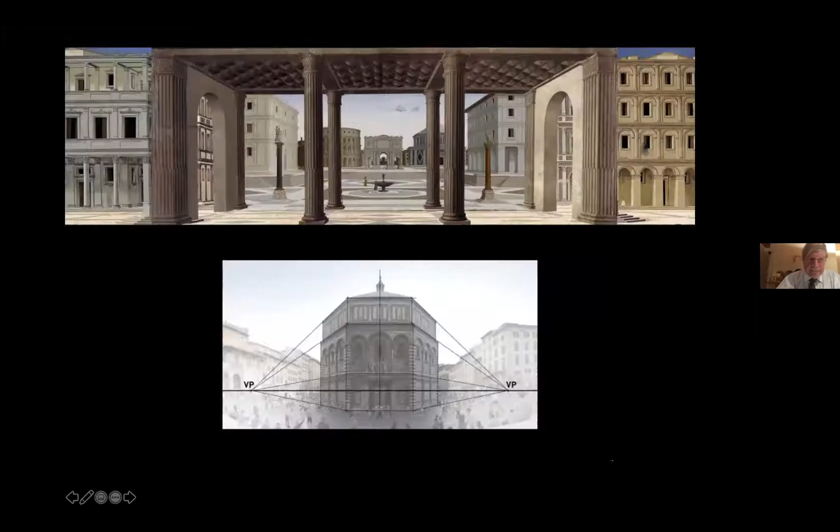You could argue that the problem wasn't so much the frame itself, but the perspective that occurred inside of it. Frames had been around for a long time, but it's significant that the mechanics of drawing a perspective were invented by an architect, Brunelleschi, and the first treatise on perspective was written 20 years later by another architect, Alberti. What the perspective did was essentially to locate the viewpoint, not the real viewpoint from which you're seeing the painting, but the virtual viewpoint where the viewer would have to be to see the painting in that regard.

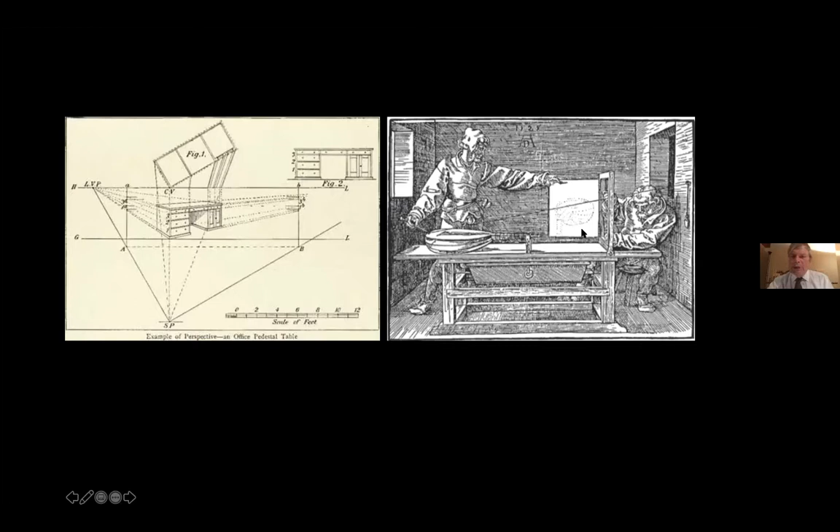This happens to be a piece of furniture, but this is the result. Again, it's not like a building elevation or a plan. You are located at a particular place from which you see the frame, and you see this image inside the frame. This is Durer's representation of this process. Here is the frame, and this represents the picture plane, the difference between the real and the illusion. On one side is reality, on the other side is this image, this representation of something three-dimensional, which is not.

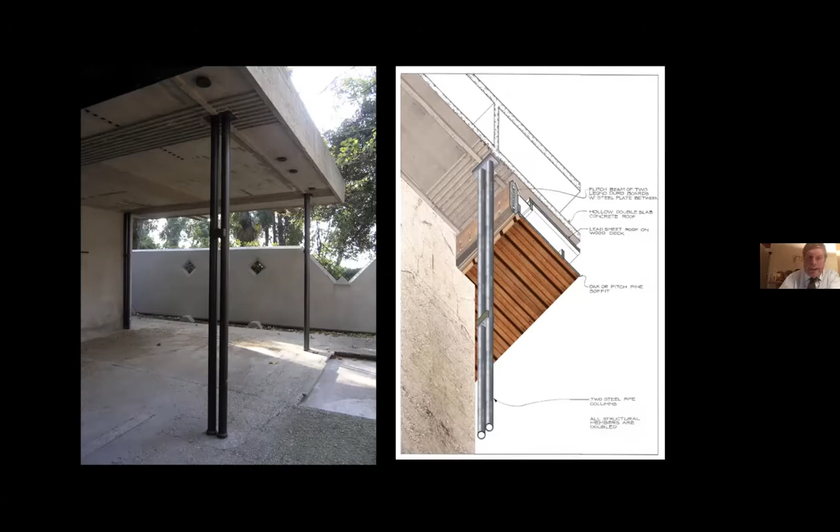What was really critical to Scarpa in terms of his engagement with the Castelvecchio was the building culture of Venice. It was very much about layered construction, as was Scarpa's approach to renovation. The Roman palazzo, the Florentine palazzo, were thick-walled, largely monolithic stone buildings. Not so the buildings of Venice—typically brick, with a thin layer of either plaster or very often marble on the outside, what we would call a veneer, what Ruskin called incrustation, or in the case of the brick domes of St. Mark's, covered with mosaic tiles.

Part of the reason for this layering was practical. Venice is built on a lagoon, and all these buildings are on timber piles. Making a building more massive and monolithic may make it weaker rather than stronger. But I think it's more than practicality—it was largely a question of building culture. Venice was very closely associated with Constantinople and Byzantine architecture in its early years, and it was the obvious transfer of this veneered style of building, very much associated with Byzantine architecture, to Venice.

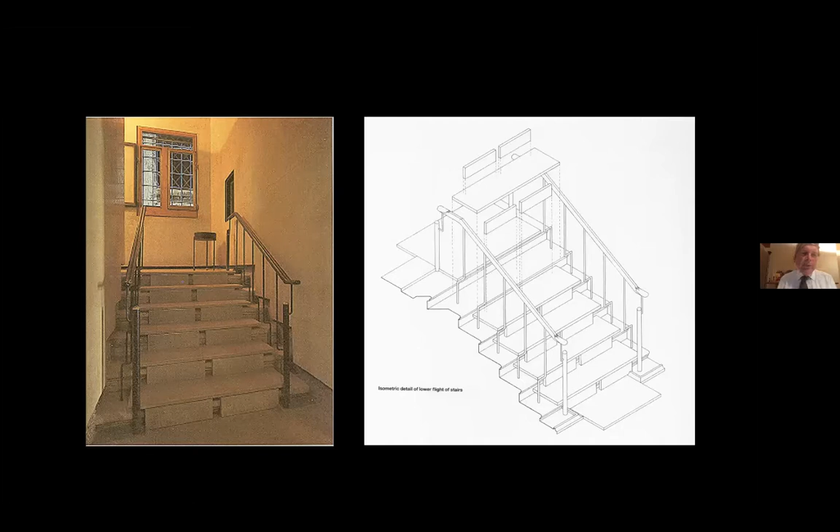If you look around Venice, you'll see this layering strategy very much in evidence. This is an Olivetti showroom, basically an office machine display store, in the Piazza San Marco. It's layered in a series of ways.

These stairs are one type of layer. But a different one is what happens along all the corners of the building. All these veneered surfaces stop well short of the junction, so you see the plaster panel here, the concrete behind it. Again, the terrazzo stops here, so you see, in theory, the concrete floor underneath it. It's literally delaminating the building to show you its layers.

This is upstairs in the showroom—an old load-bearing brick pier that had to remain in place, and Scarpa clad it with thin layers of stone. Look at the way he does it: the corners aren't mitered, but the edge of the stone is left rough while the face is polished. You get this stark contrast, this sort of pinwheeling effect. There's even a little hole so the mason can reach in and complete the fastener that holds the veneer in place. The point is he's celebrating, in fact exploiting, the quality of layering rather than trying to disguise it.

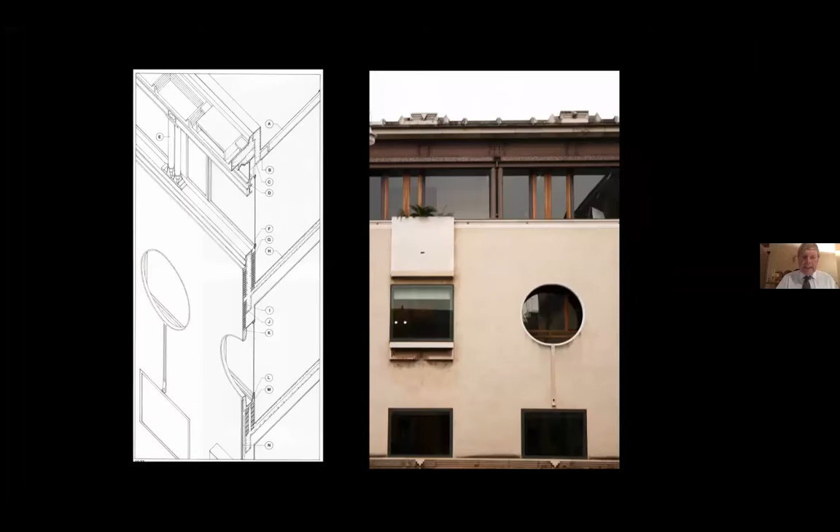This had an interesting effect when applied to the window. This is the Bank of Verona, and there's nothing historic in this building—it's a brand new construction from inside to out. But it shows you that Scarpa continued this layering strategy in the facade, and it resulted in a rather curious kind of window.

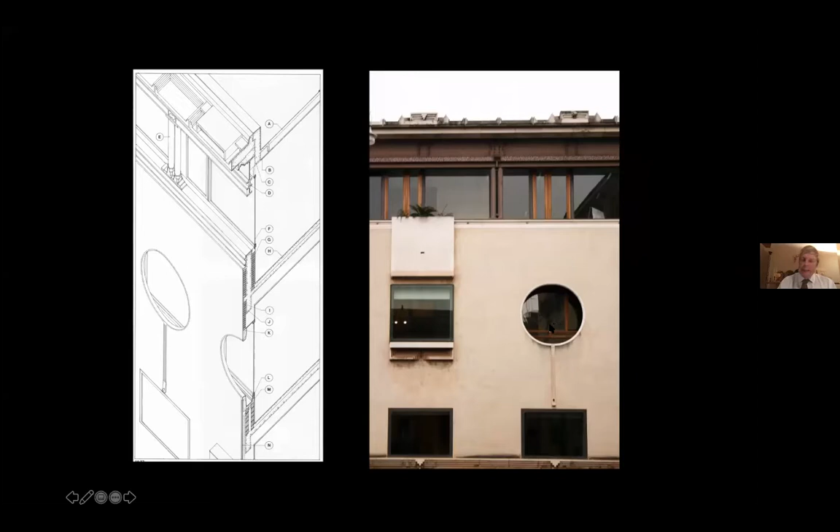There is a wall plane here constituted by what's really a concrete wall faced with brick and then stucco, with rather conventional window openings cut in, frames if you like. But the glass is never set directly in the opening—or not never, but for the most part it sits in front of it, as here in this projecting bay, or behind it as in this round one. The window behind the round bay is actually square.

I don't know for sure this is good grammar, but I'm going to call this modes of unframing, and talk about the various strategies Scarpa used to both get rid of the frame and get rid of the pedestal.

I don't know if Stephen Leet is part of the audience today, but if he's there, he's probably thinking, isn't it time to talk about Franco Albini? And he'd be right, it is time to talk about Albini. Scarpa was not alone in this exercise.

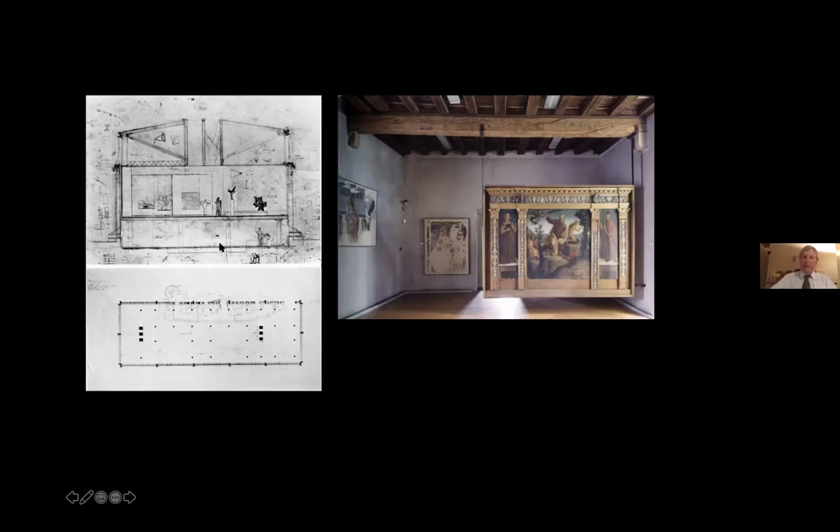Hanging was a solution to this. This is another moment in the Castelvecchio. This allowed these pieces to literally float in space. This was a proposal, again for the Biennale, in which all of the painting in the space would be suspended from the roof. But there are obviously practical problems with doing this throughout.

This, I think, was the arrangement that Scarpa really preferred, particularly this one, which is simply that the painting is liberated from its environment. It's put on this easel at eye level, so it becomes literally a person in itself, very much like the Giacometti's I was showing you. Often he will put these facing away from the door so that you have to walk around the front to see the piece.

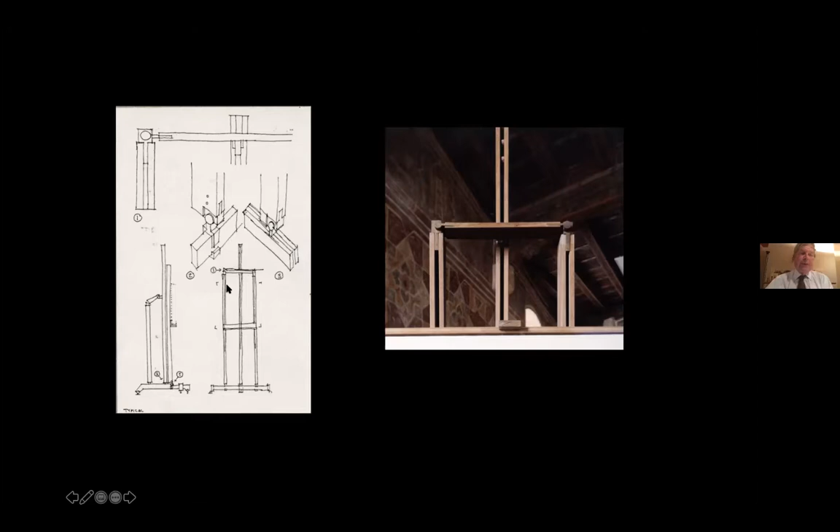This is another arrangement, the freestanding painting as an object within the room. This is called a cavalletto in Italian, a Scarpa piece of furniture well worth looking at. You can see all his devices at work here—the structural doubling, the little brass fasteners holding it all together—and again it's a little kind of miniature Scarpa building. But what he really loved about these is they had an anthropomorphic quality, so that the painting became a freestanding person in itself.

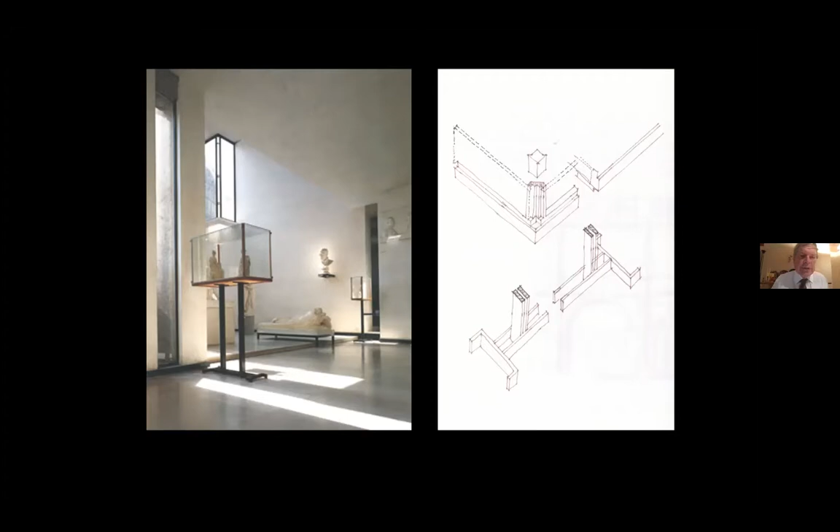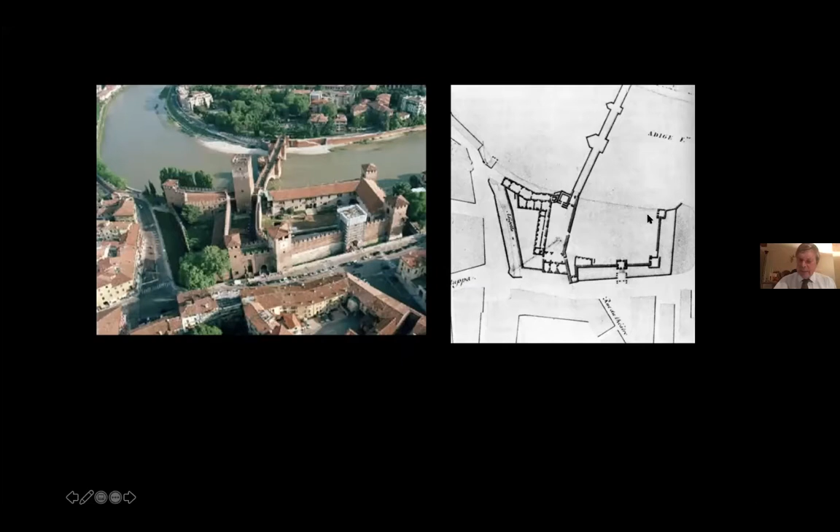This is the way the plan was until about 1800. This is the building where Scarpa's museum is located, but that was not there at first, it's not part of the medieval building. In the Napoleonic era, the threat changed to the north and they built a wall on what had otherwise been open.

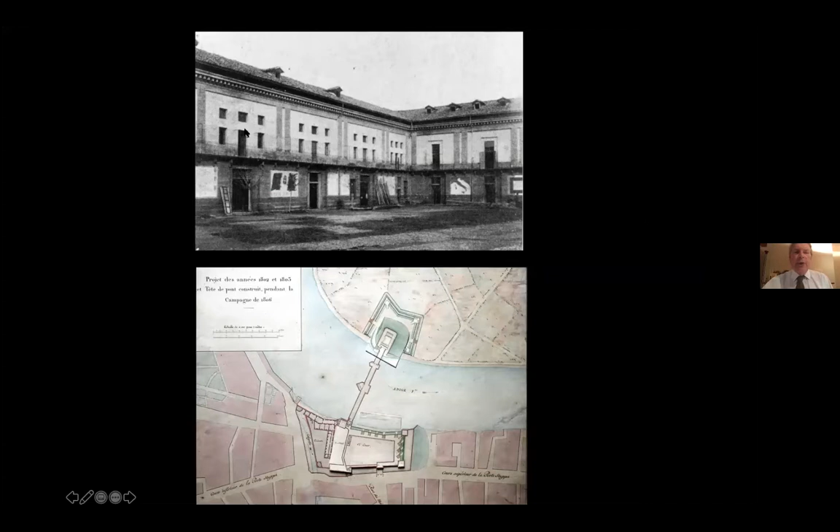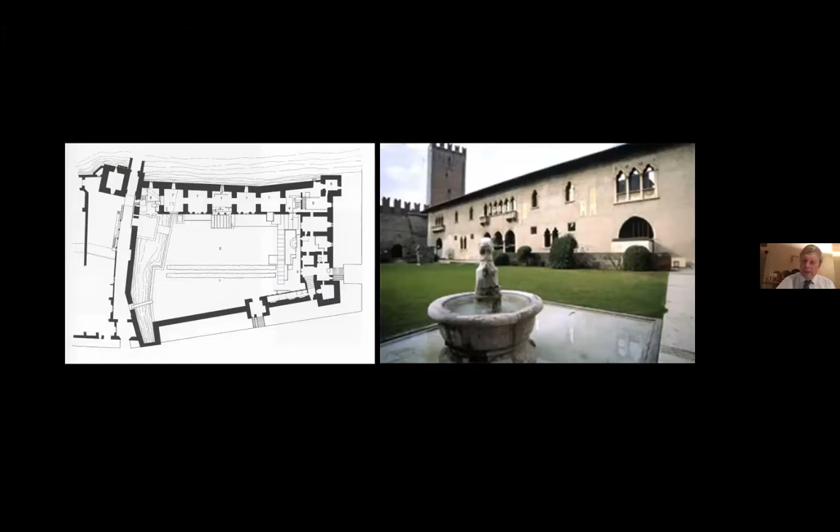Then the Austrians, who occupied Italy in the early 19th century, built this rather uninteresting barracks there. The old barracks became a museum in the 1920s, and it was a pretty cheesy affair, very much an ersatz Venetian palazzo. The inside had fake fireplaces and fake beams, and the outside was redone with fragments of a Venetian palazzo.

This is a real Venetian palazzo. These are fragments of one worked into this wall in a way I'm sure Scarpa found repellent. So if you were doing a historic renovation of this building, there would be, in Scarpa's mind, a good argument for just getting rid of this part, because this is real medieval architecture, while this is the fake medieval architecture.

But because it was the museum, Scarpa really couldn't dispense with it altogether, so he tried a couple of things. He originally wanted to get rid of these fake elements, to cut off the top of this wall to distinguish it from the real medieval parts behind, but the museum director wouldn't let him do that.

What he did do is basically delaminate the building. He divided it, as he had done elsewhere, into a series of layers, adding some of his own and revealing some of the old. He also cut the new false layers away from the old real ones, right here where this new wall touches the old, cut away to form a window.

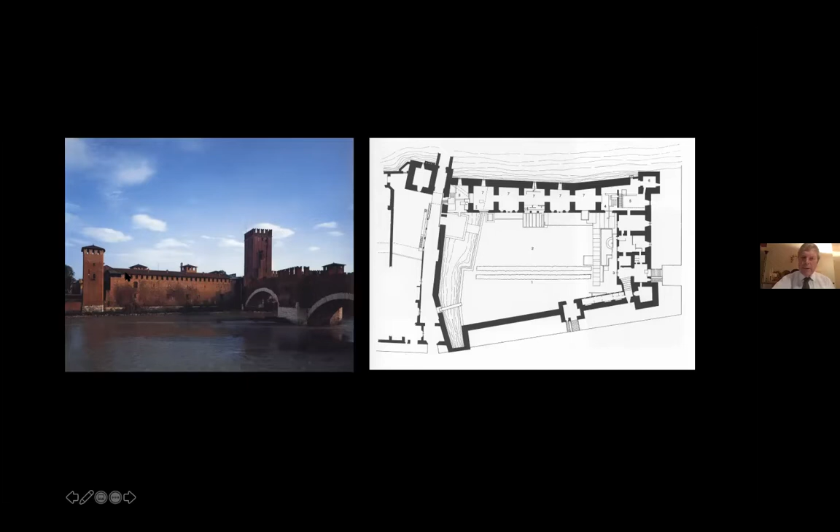The other window is this famous shot you see of the Cangrande statue, and again you can see the window on the other side. You can see him delaminating and peeling away the layers to tell you the story of this building. Notice that the plaster stops here, the stone stops here, showing you the steel frame. The tile stops here, then the layer of copper continues, and finally the beam continues over to the old wall.

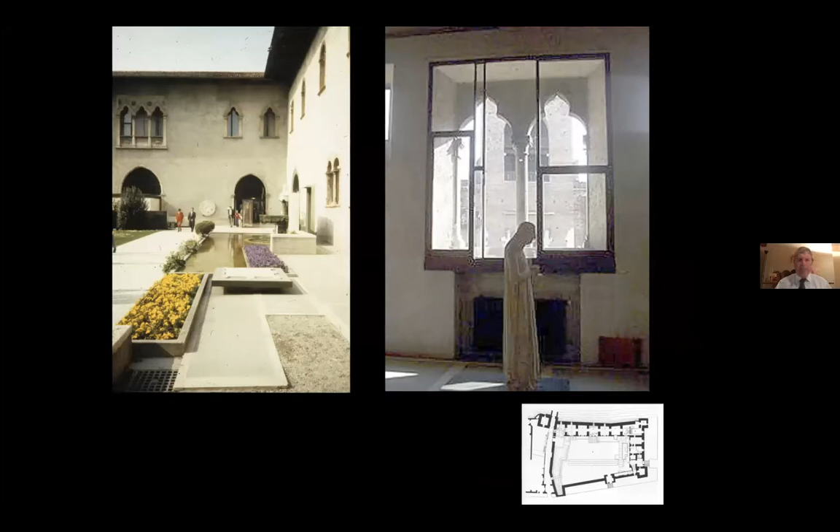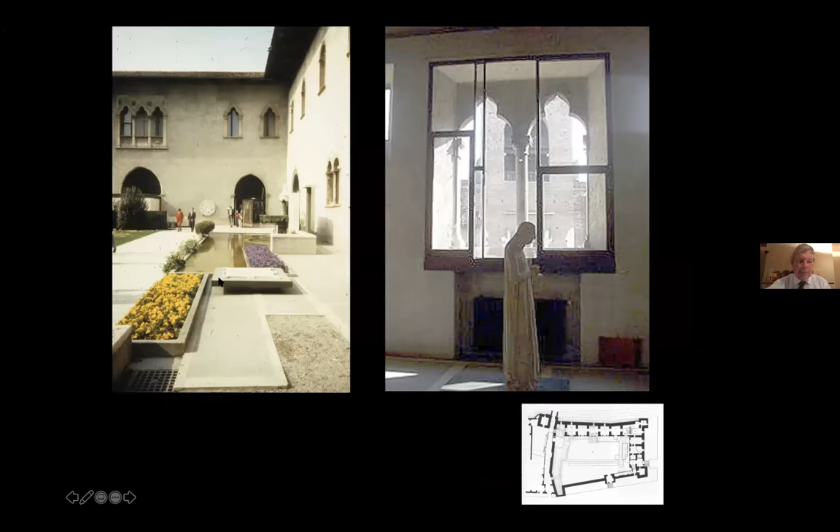This copper roof does not extend all the way under the tile—it's a symbolic layering at best. But this layering strategy continues and sets it up as you enter the museum. Scarpa thought of the floors of this museum as pools of water, and he literally sets up this metaphor with these floating floor slabs before you enter.

Of course, it's layered on the inside in this traditional way. The actual glass is pulled way back from the opening, so you get this layered window we've already seen. It's a familiar Scarpa detail where everything stops just short of meeting the next layer. Notice these stone slabs occur only on the side of the opening—they don't wrap around.

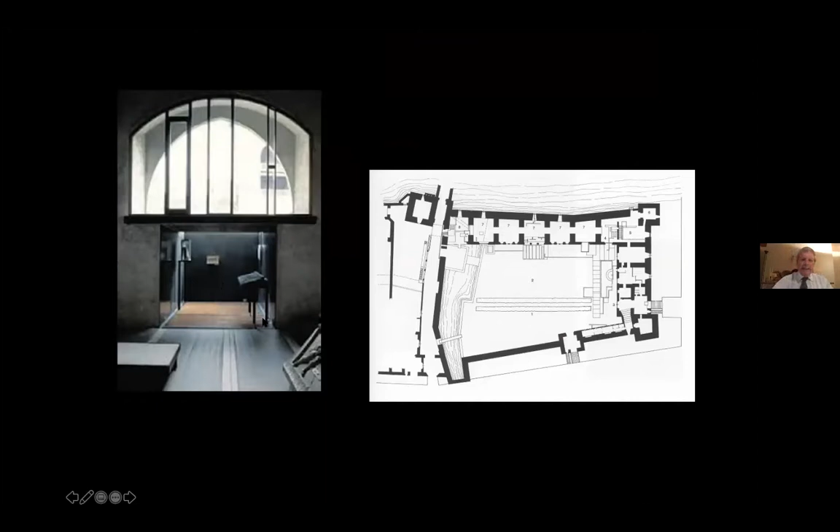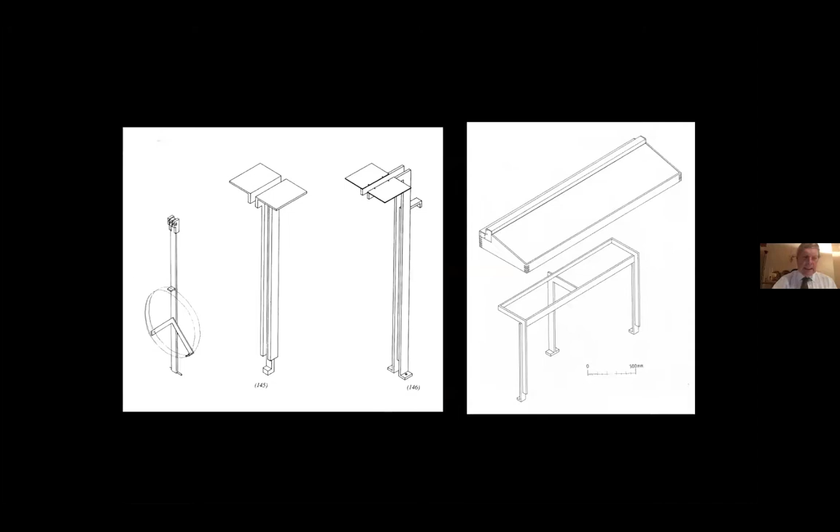This little piece is called the sacello. It sticks out of the building right here. It's interesting to see how these parts are supported—they're not literally hung on the wall. There are a series of steel frames and steel angles wrapped around the edges of the building, and all of these connectors are welded to them. Again, this indirect support—this one is hung, a strange sort of tripod of effects holding up this glass case. You can see it's always doubled structural pieces.

Of course, the key piece of delamination here is this rather structurally strange but visually compelling steel beam that's holding up this concrete floor. They're only connected at one point—you can see the end of the steel beam here. For the most part, the steel beam is separated from the concrete, but it supports it at midspan, a good place to support it with this small pivot.

Scarpa had the advantage that in this part of the museum, it was divided into the sculpture gallery and the painting gallery, which seems a bit pedantic, but it gave him the opportunity to put the sculptures in spaces where there was literally nothing on the walls. The typical sculptures he was showing are very much like these—carved all the way around, but made to be seen frontally.

This is another church in Verona, and these pieces are still in place. They're carved but rather uninteresting from the back, so you can't tell much about them. It's interesting to see what Scarpa did in terms of studies. He worked around the museum for a long time, and this was the first arrangement set up in the 1950s. Entering the room where this photograph is taken, none of these pieces are facing you—they are facing away, in fact facing the window to catch the light. I think it was partly about lighting, but also about avoiding the confrontation.

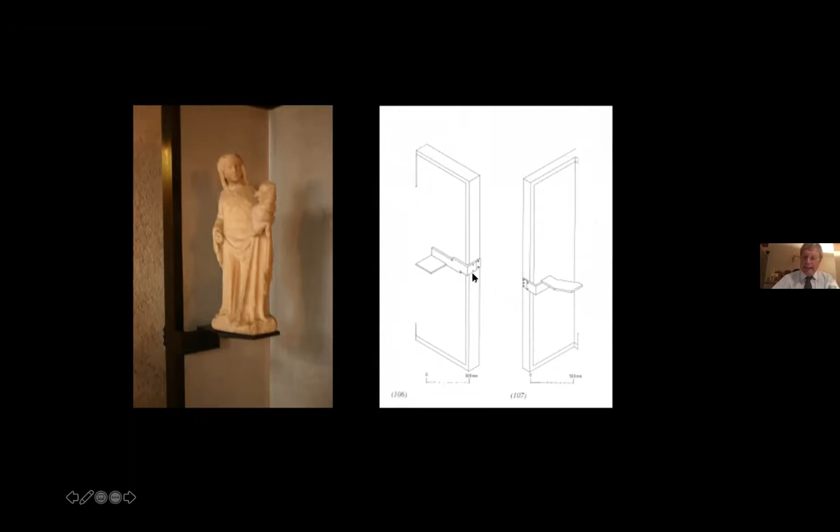Richard Murphy says that this Madonna is missing her hand, and that this represents the missing hand. I have a slightly different interpretation. This Madonna is in contrapposto, that is this classical Greek pose where the weight is on one leg. The other Madonna, which is considerably heavier, both her and the Christ, quite a few more pounds, but it's a far more direct load. And again, without the contrapposto, has this slightly different arrangement.

Again, this is the last piece, the last room. Again, at this place there is a pedestal, but the sculpture's at eye level. But this brings you to the Cangrande.

This is, again, the centerpiece of the museum. This one was put in its original location. That is, it was meant to be—this was the Scaligeri family, and Scala in Old Italian means ladder. And this was their symbol, so their tombs, this is elsewhere in Verona. This was where this statue was originally located.

So what Scarpa is doing is your first exposure to the statue is from the way you would have seen it in its original location. As you move through the museum, you actually come back this way, you see it more directly. But again, here it is at this point, as you move back through the museum this way, you see it in a different light. These are very interesting rooms over here.

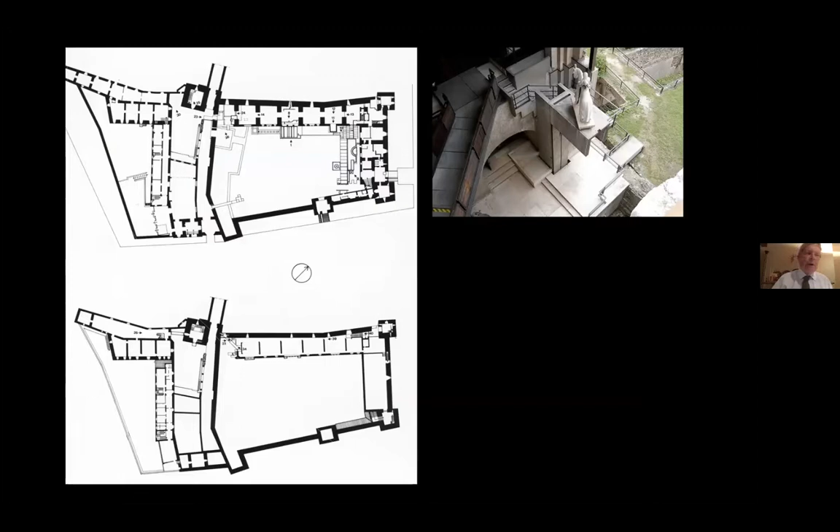They weren't very often changed because they were genuine medieval works, but this is one of the more interesting ones. Scarpa's doing here with these easels what he had done with the sculptures in the room. He's really personifying these paintings.

They're hung at eye level. They are freestanding within the room. They're not hung on a wall. And again, as you see here, when you enter the room, two of them are facing away from you, and one of them is slightly angled to the view you're seeing.

But again, this I would say is really the point of this lecture: that this strategy, which is certainly present in the Giacomettis—a far more modern view, one where there's no framing, no confrontation, no axial picture plane or station point—is the same strategy used to arrange the sculptures here, and the same one he used to arrange the...

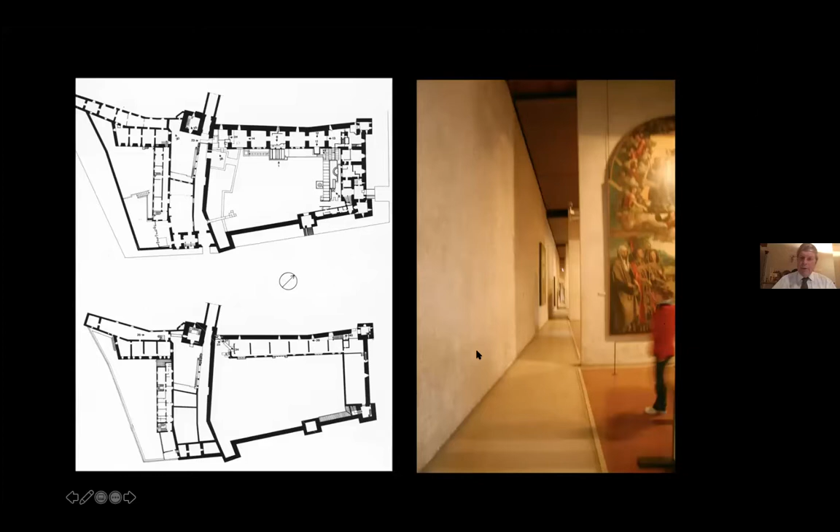Paintings here. The picture gallery, which is on top of this, is less interesting. Originally, these were—Scarpa actually closed up the center doors and opened up the edges so that you had this almost freestanding set of partitions. This is looking along that wall. And again, he didn't really want to hang paintings on this, but over time they've been put there.

Fehn, like Scarpa, saw the world in layers. He was far more interested in horizontal layers than he was in vertical ones, and it had to do with his particular view of his home country.

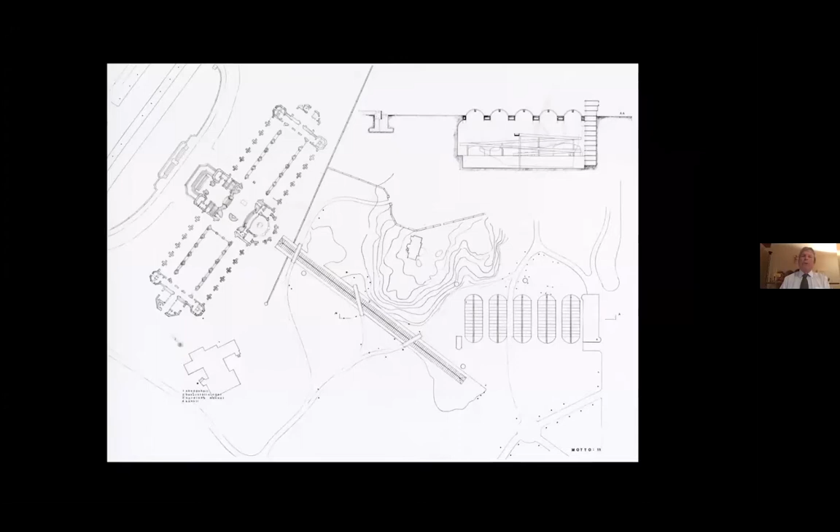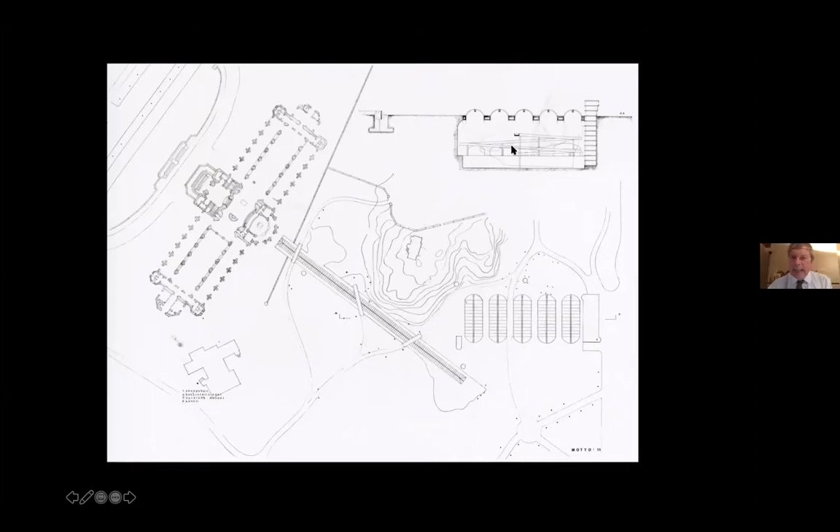And Fehn's idea was to rebury it, basically. This is the main museum, and this is the top of Fehn's museum there, which you really couldn't see except for the skyline. Again, he wanted to put it back in the ground in this excavated museum.

This was a later competition. This was an old mining town in Norway, and this would seem to be the obvious program and location to have an excavated museum. Here he chose to do the opposite, that is, he made a bridge. His museum floats in the air, touching the ground only at two points.

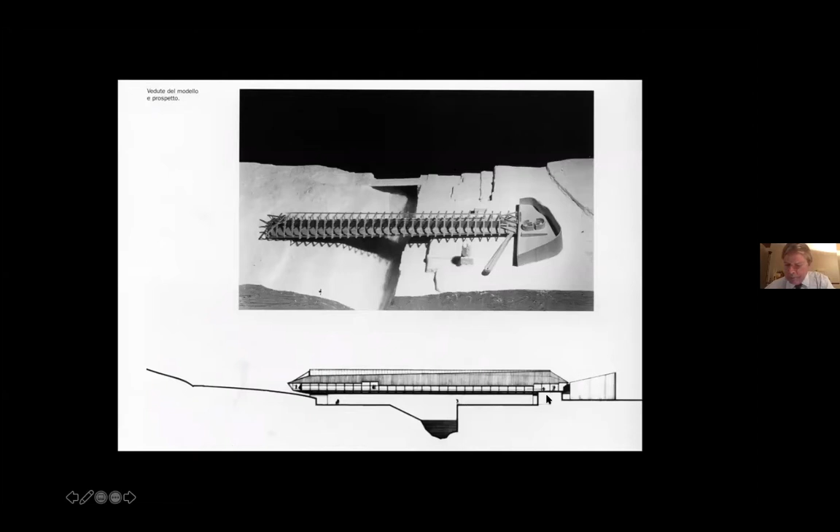But again, this is Fehn talking about the magic of history, the excavated artifact, and as we'll see, this is very much about what the Hamar Museum was about. This is his drawing of those three museums: the underground Vasa Museum, the floating bridge museum, and the Hamar Museum, which what you're seeing here is a ruin. These are the ruined walls, these are the archaeological excavation, and these are the two bridges that float above it.

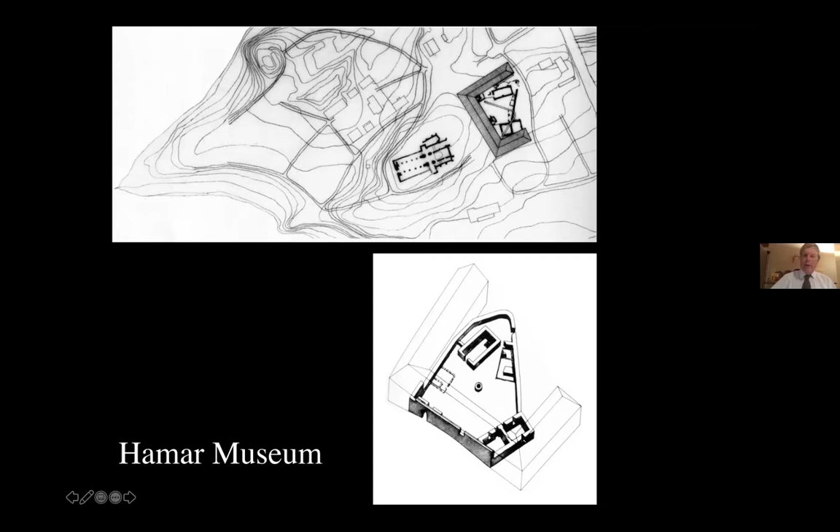So there were three very distinct historic parts of this building: the old bishop's palace, which is the same age as the church, and this barn on the outside. This was in ruins. Again, the walls were there, but the roof was deteriorating or gone by the time Fehn took it over. This is not the Fehn project - this is what encloses the old ruin of the church.

This was done by Lund and Slaatto. It is actually a very nice building, but it's a very different approach than what Fehn would take - that is, the sort of gigantic glass display case. This is Fehn's building. Again, he basically rebuilt it from the top of the stone wall, and of course he did a lot of work stabilizing and preserving and restoring the stone wall.

See the layering already in this case is effectively reversing what Scarpa had done. He puts the glass on the outside rather than the inside, and lets the ruinous state of the wall exist. Again, the museum has distinct parts. You can see a bit more of this glazing here.

This is the auditorium. This was a museum you might call a folk art museum, basically tools of day-to-day life. This is what was the oldest part. This is where the remains, these walls were at least in part the remains of the older building, which is the palace.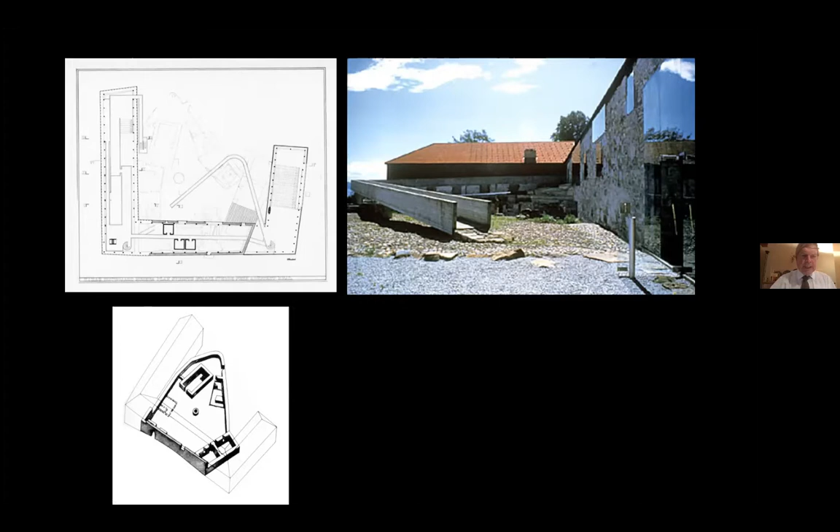What is really almost shocking about this arrangement is this ramp, which I'll come back to. But again, this is this glazing. This is actually a detail borrowed from Sigurd Lewerentz. And again, these aren't really windows, they're really just glass coverings. But again, adding a new layer to the old.

This is the entry. But again, this is the most striking part of the complex. The new part of the complex is this huge floating concrete ramp. And again, this is part of Fehn's tripartite world, the elevated world above the ground, the excavated world below. And this architecture was very much about ramps connecting them.

But it's a strange journey. You enter into this really non-conditioned space and then immediately exit it into this ramp, which then takes you up to the top part of the auditorium, and then you descend down into the auditorium proper. Again, this is the beginning right here. This is the top.

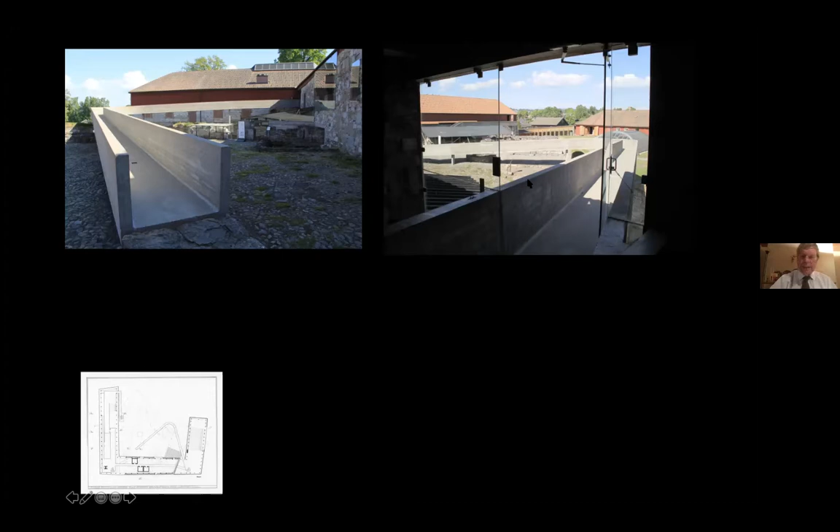This is, again, these models, these ramp models, which I think tell you a lot about the way Fehn saw the space that takes you up to the top of the auditorium. But you can see right here what Fehn is doing. He's imitating, not precisely, but figuratively, the shape of the old wall of the bishop's palace.

This quote, I think, has to do with it. This ramp got a lot of criticism. It was called brutal and aggressive. And Fehn, again, who seemed to be receptive to criticism, said yes, it is brutal and aggressive in the sense that it helped you reconstruct the building in your imagination.

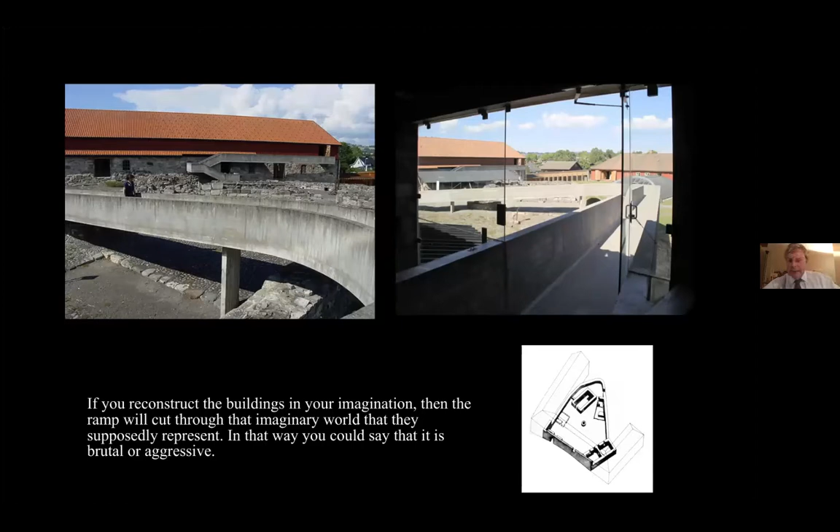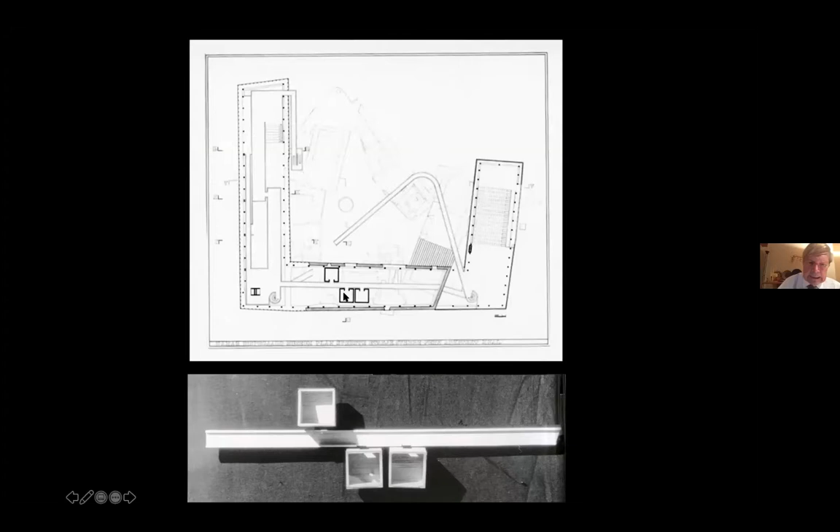Again, here's the auditorium. Again, this is the curious part, or the most interesting part. Again, this is this floating little chapels. And of course, this was the part of the building that had religious connotations. That is, what artifacts or what objects they have that have a religious nature are placed in here in these skylit chapels.

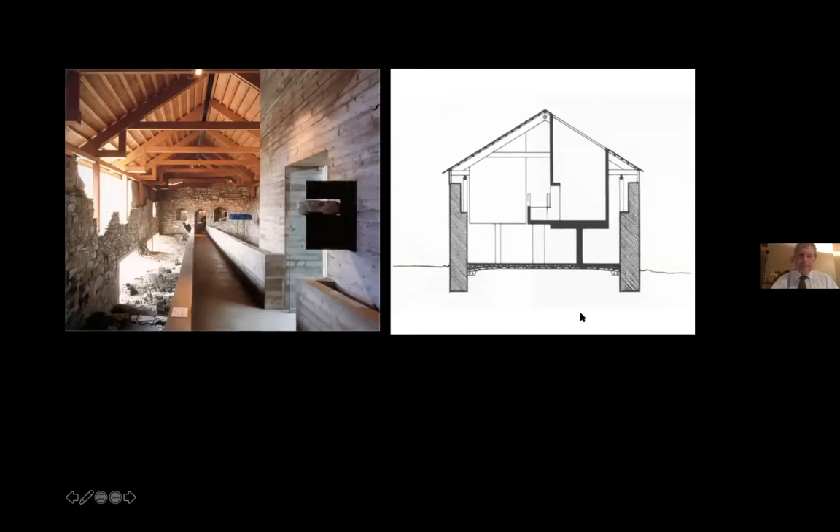This is the floor you can walk on, and this is the elevated platform. This is the entry to one of these little cubes, again, which receives skylight from these glass tiles in the roof. This particular one is where this Madonna and Child is located, again, with this non-framing frame.

All of the elements in here, they're given a sort of a religious association in terms of where they're located. There's a crucifix up here. There's the Madonna around here. On the outside of this piece, this is a sort of gargoyles. This is a demon, so the demons are on the outside and the saints are on the inside.

But again, this is this type of support that Fehn, I think, learned from Scarpa, using it vertically rather than horizontally. This is a wonderful piece. These are two, again, pieces with religious connotations, a very, very delicate crucifix, and this large stone, which has these carvings on the side that have—I'm not sure what they represent, but I think it's part of a depiction of a saint. Again, set in opposition to each other on top of this stone base.

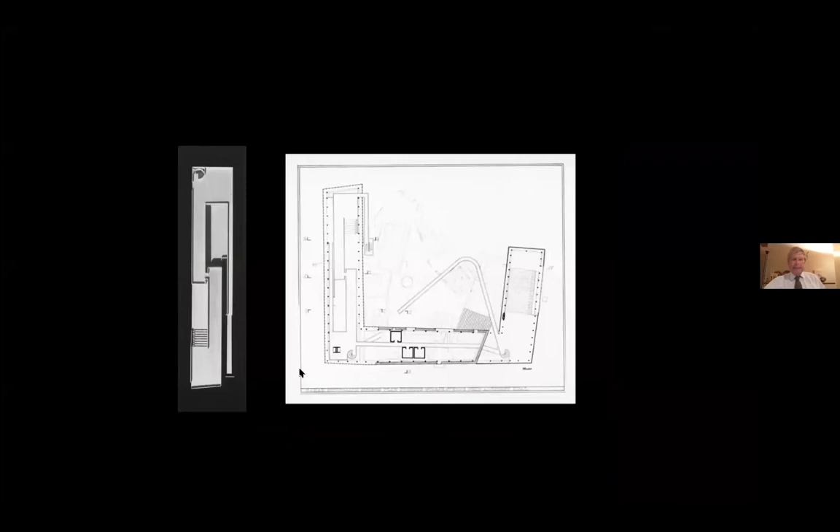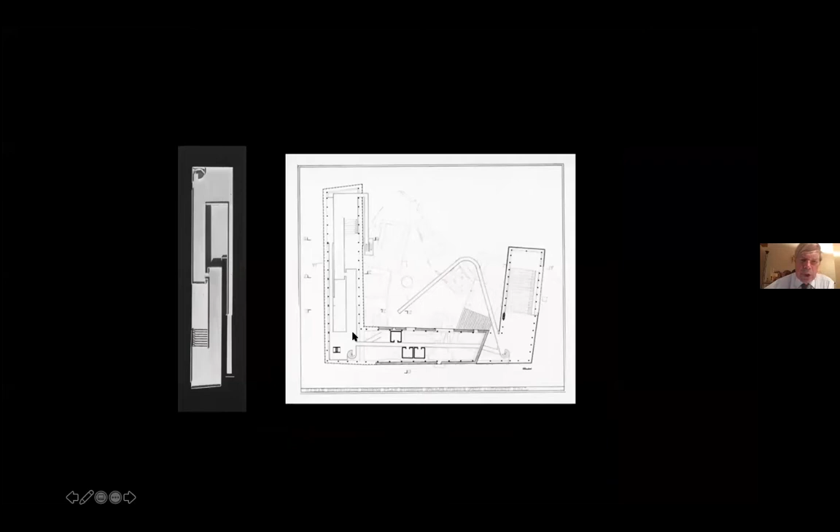But again, the most real building-like part of the complex is this ethnographic museum. Notice it has three layers. It has the outer stone wall. It has this inner wood frame, which is all new. And then it has this concrete set of ramps and stairs on the inside.

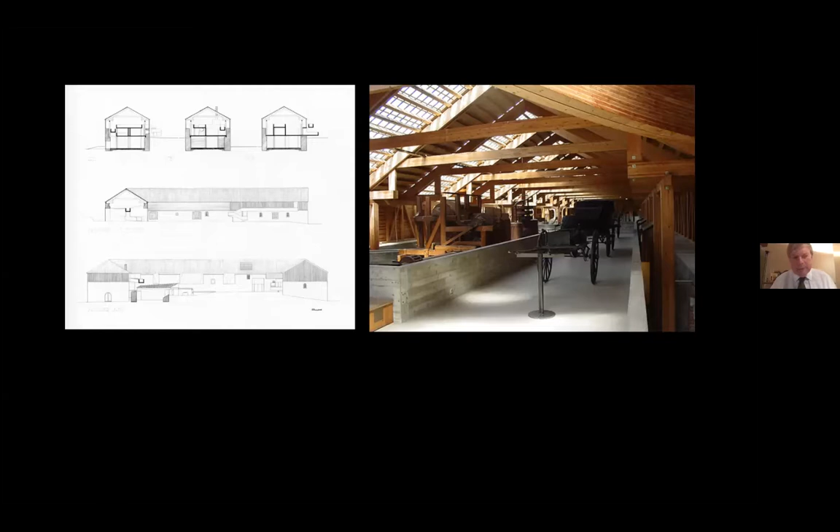Again, you can see a good view of it here, the independence of the layers. Like Scarpa, Fehn is using these horizontal and vertical layers to lay out the book, turning the leaves of the page that is the history of this building. You can see them clearly: stone wall, wood frame, concrete inset.

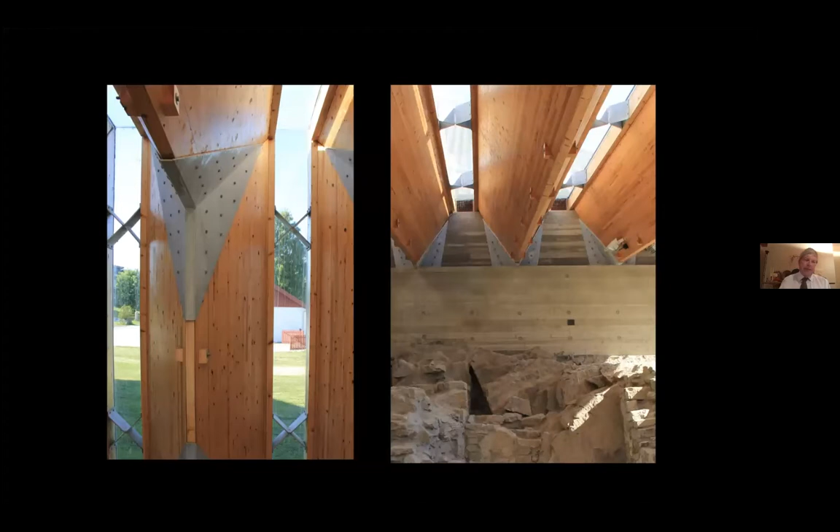If I am an expert on detailing, I would say this: I find Fehn a far more interesting detailer than I find Scarpa. It is not about motifs or geometric form. It's about using your problem-solving capacity to elevate a joint or a connection into something more than its purely technical necessity.

So again, I'll say goodbye to Carlo and his double circles.

I know I'm running over a bit, but let me say a few things about the relevance of all this. I think the lessons of Scarpa and Fehn have been largely disregarded. I'll show two examples in the town where I live, Charlottesville. One is this idea that restoration is about layering rather than making things new.